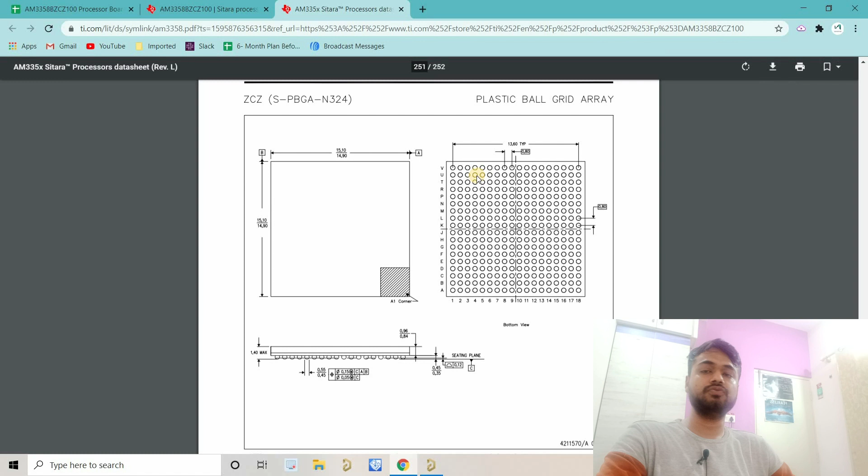So firstly I will tell you how we're going to create that. If you go to Tools, there you'll find a few options for creating the footprint. For the BGA package, I'm just going to use the IPC Compliant Footprint Wizard, right? Because we have all the dimensions given in the data sheet. So we will use that wizard to create that footprint.

Okay. So let's go to Tools, left click on Tools, then left click on IPC Compliant Footprint Wizard and this window will pop up. Now here you have to click on the left, and in this section you will find a lot of predefined packages like BGA, QFP package, chip array package, DFN package and a lot of other packages, right? In our case it is BGA. If it is not selected, just left click on BGA and it will get selected. Now click Next.

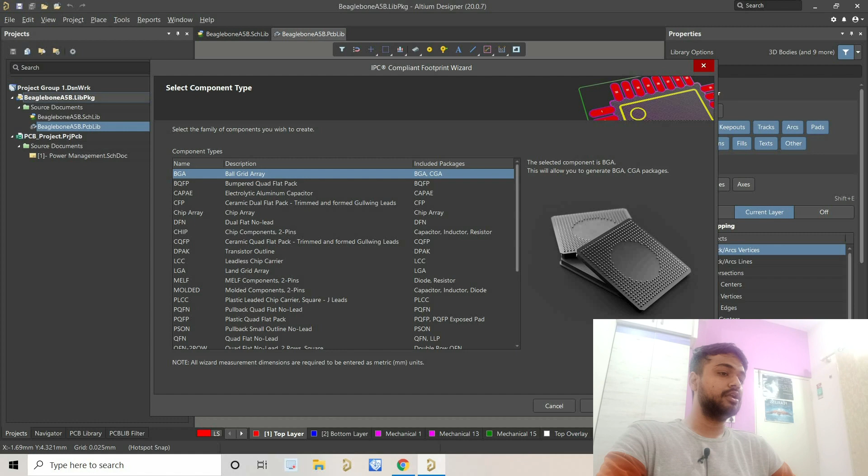Now here we need to fill in the information that is given in the data sheet. I will go through them one by one. If you want to open the data sheet and follow this tutorial, open it with the link given in the description, or you can directly search this part number. It is quite big, but it is AM3358BZCZ100, right?

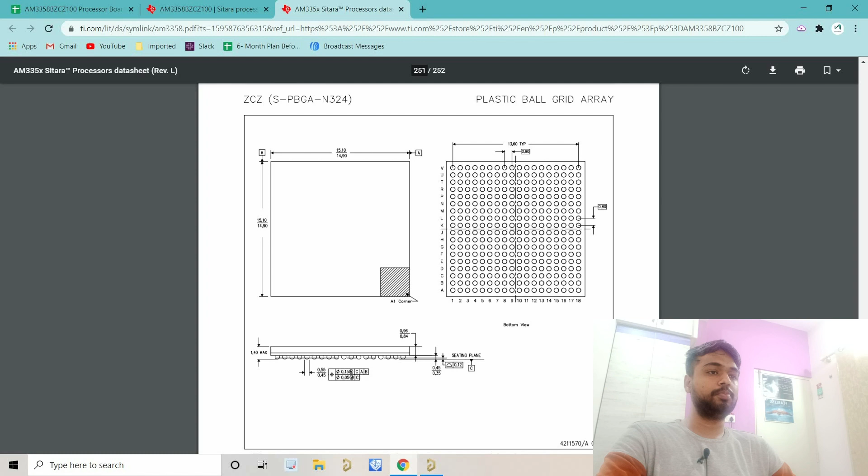From there you can open the data sheet, and in the data sheet you will find two packages. One is for ZCE and another one is for ZCZ. We are using this one in our upcoming project, so we'll follow this one, okay? So now again go to Altium Designer.

Here it is asking for the maximum height of the component. If you look at the drawing, just follow my cursor, this is the maximum height. In our case, it is denoted by this one. It is 1.40 max. So we'll just click here. It is already filled, just 1.4 mm, right?

Now it is asking for the minimum standoff height, right? For that, open the browser again and you can see the maximum standoff height is 0.45 and the minimum is 0.35. Here we need to fill in the minimum height, right? So we'll just put 0.35.

Next is body width. You can see body width is given as 15.1, right? So we'll fill it here, 15.1. It is asking for the minimum here. What is the minimum size? It is 14.9. So we'll click here and fill in 14.9. Similarly, it is asking for body length in the D direction. Make it 14.9 for minimum, and maximum is the same, 15.1.

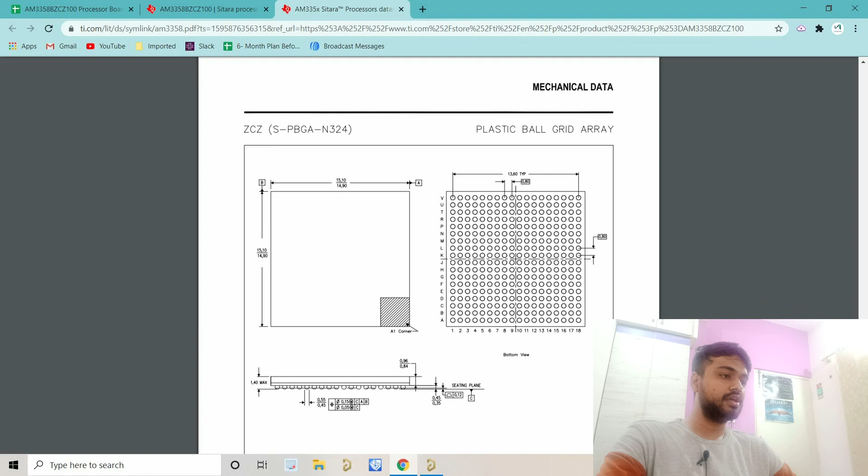Now here we have to fill in all the ball information, as you can see written there. Firstly it is asking for E1. E1 is the center to center distance, right? Let's open the data sheet again and you can see it is given here. If I zoom in a bit, you can see it is 13.6 typical. So it's already filled there, right? Similarly, you have to fill in the D direction, 13.6.

Now you have to fill in the ball diameter. So again, let's verify what the ball diameter is. You can see it is given here and it is 0.55.

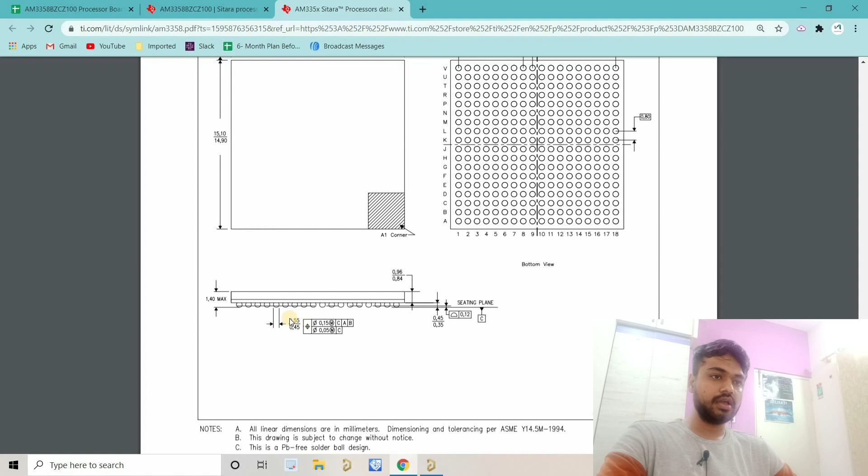So you can see I already filled here, right? Now we have to fill the pitch. Pitch is basically the distance between two balls from center to center. So it's given 0.8 here, so we'll fill it 0.8, right?

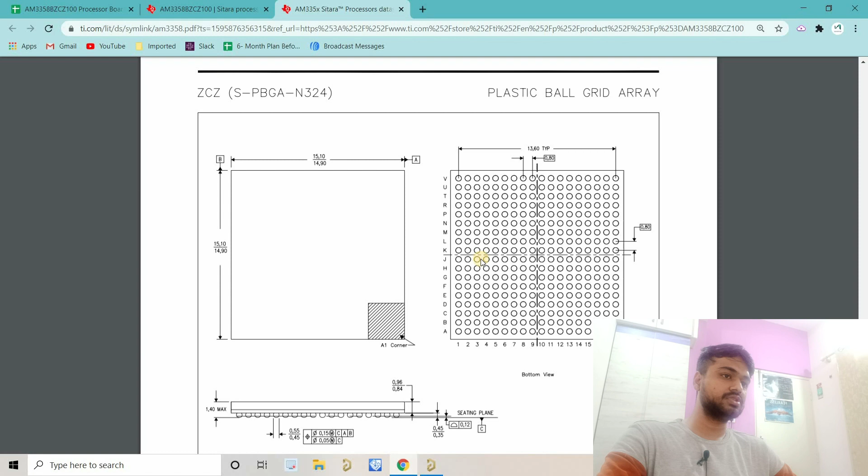Now you have to fill the number of columns and number of rows. So we'll open the data sheet again, and you can see the number of rows and number of columns are 18. So I have already filled those, right? And now it is asking for the actual number of balls present. So you just multiply 18 by 18 and you will get this number, right?

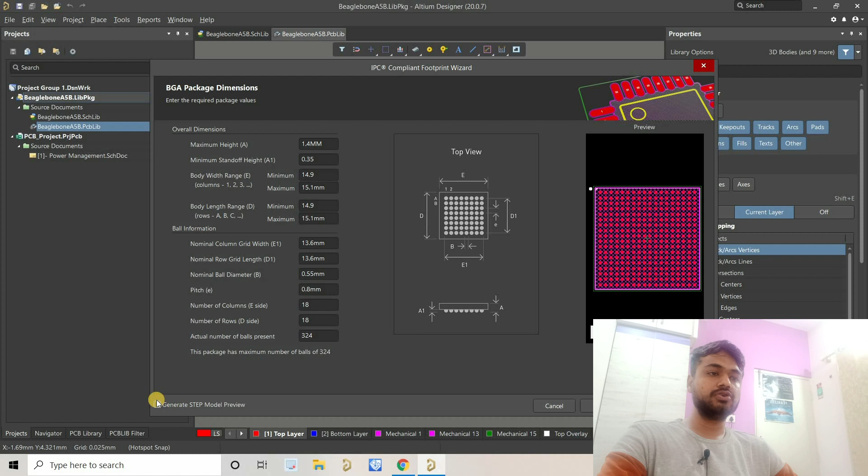Now we have to left click over next. Before going further, you have to just click this one, generate step model. So it will generate the step model here, you can see, right? So it will be reflected on our footprint also. Now left click over next. Just leave this by default. Next. Yeah, this too.

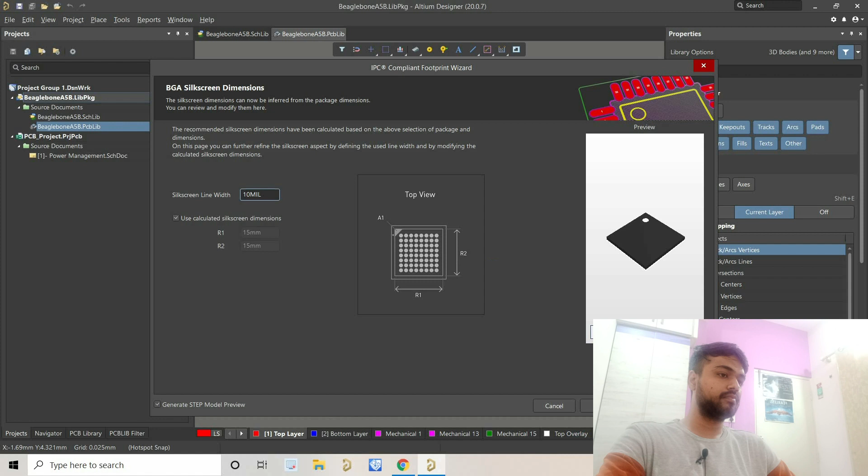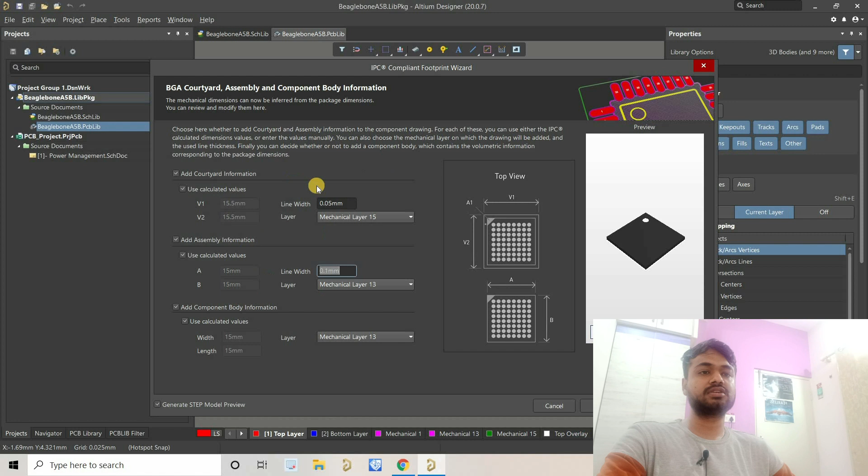Next. Here you have to select the silk screen. So I generally go for 10 mil. Next. Now it is asking what should be the line width for the assembly line, and what layer you use for it. So you can select as per your library database. Suppose in your database mechanical 8 is the assembly line, so you can select mechanical 8 here and select the line width. I'm just leaving it by default. You can customize it as per your requirement. Now left click over next.

So here you can just fill the name, whatever you want. I am just using the name suggested by Altium Designer. Next. And now it is asking where you want to save this. So I'm just saving it in the current folder. You can browse wherever you want, or if you want to change the name of the file, you can change it here. And just click this one also, produce 3D step model, right?

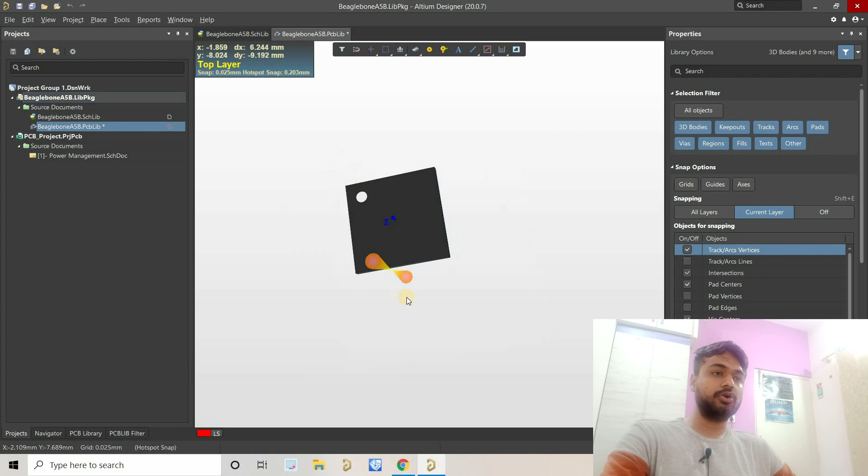Now next and finish. Here we go guys, we have made our first BGA package using the Altium Designer IPC compliant footprint wizard. If we press 3 on our number pad, you can see the 3D model of it. And if I zoom, you can see all the balls are completely aligned with the pads.

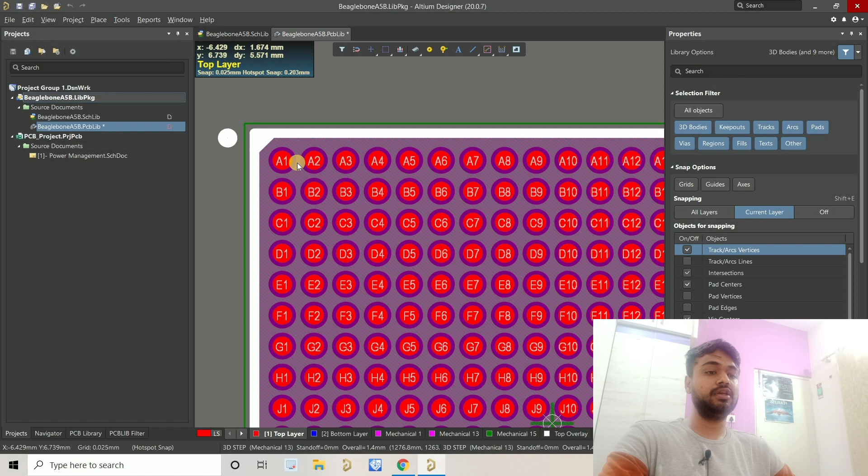Now we'll verify the footprint, because that is very important, because it is a processor footprint. If something is missed, it will be a very huge problem when we manufacture our board. So we'll just see. According to this footprint, this is the first pin, and it goes A1 to 18, and similarly here B1, C1, D1 to V1.

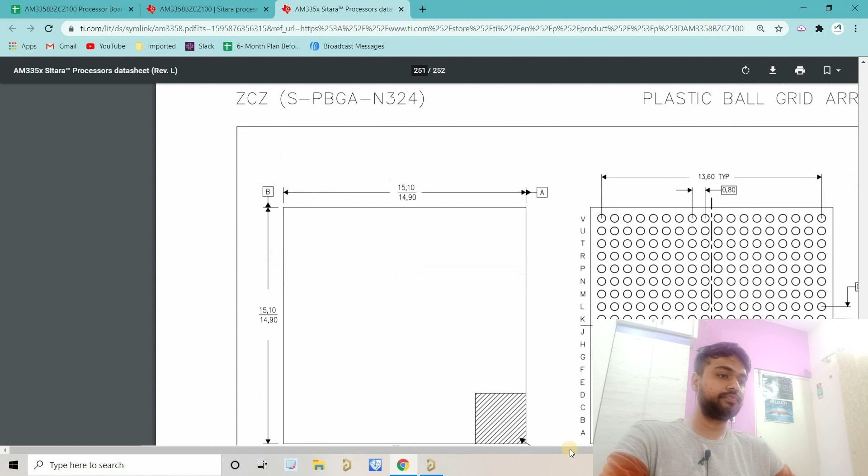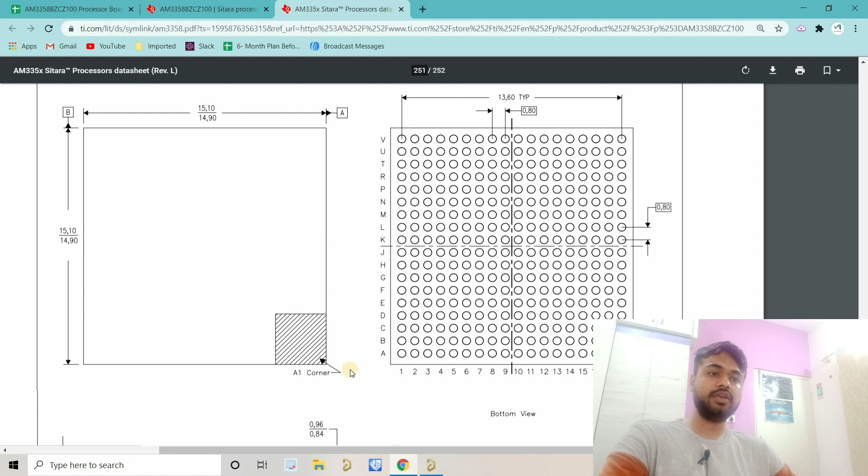So we'll verify that. As you can see, if I zoom here on the footprint, on the horizontal line it goes 1, 2, 3. So it will be A1 to A18, and here it will be A1 to V1, and this is the first pin, right? You can see here the A1 corner. Because this is the bottom view, A1 is this one, right? In our case also it is the same. So our footprint is fine, and we can use it for our PCB design.

So that's it guys, this is the complete tutorial of BGA, and I always recommend using the tool. Do not try this manually, because there are a lot of chances to make mistakes, right? Because it has 324 pins, and it can misalign or create bigger issues, right?